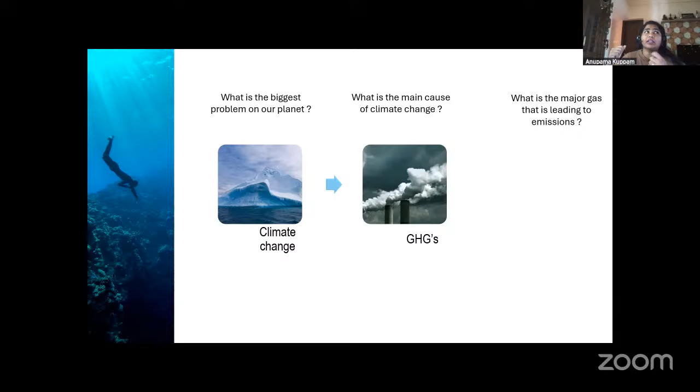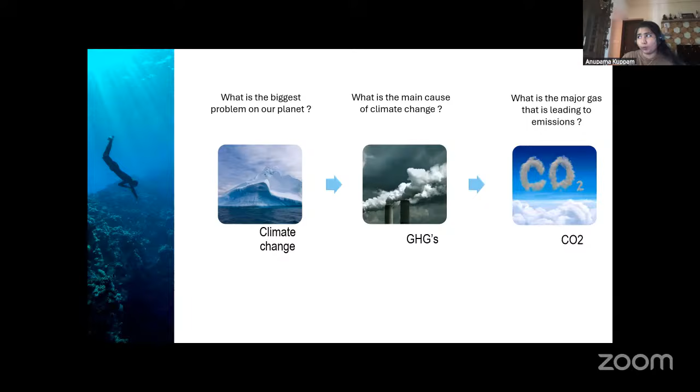Out of GHGs, which is the major gas leading to these emissions? There are n types of gases like carbon dioxide or fluorides, etc., which are even causing trouble to the ozone. But my main focus is CO2. I'll tell you comparatively how much CO2 is, when compared to other gases. Carbon dioxide itself releases around 76% of emissions, and the rest, like methane, nitrous, fluorinated gases, and other gases, are in very minute quantities.

The second most common cause is agriculture. Why am I telling you agriculture? Because it includes crops, landfills, waste, and also deforestation - these all come under agriculture. We have been studying that throughout architecture, I believe.

And the next one is industry. What comes under industry is oil and gas, some iron and steel production and extraction, and also mining. I can say mining is one of the major concerns under industry.

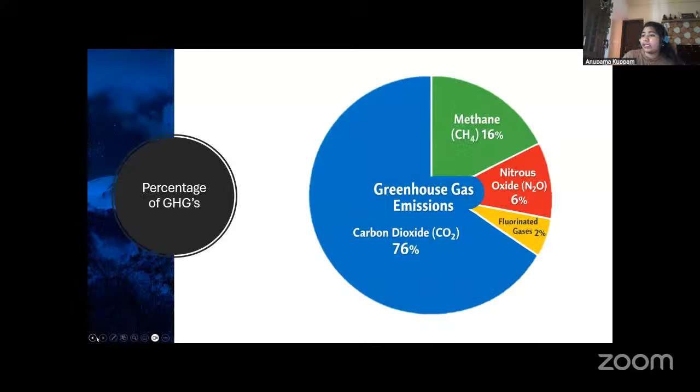They started with carbon neutrality. It is something similar to net zero, but not net zero carbon. Why? Because in carbon neutrality we focus only on carbon - whatever carbon emissions are done outside, we try to balance it, that's it. But when it comes to net zero, we count carbons, nitric acids, sulfur, fluorine, and chlorine substances which we release - everything together as a package. That's where it differs between carbon neutrality and net zero.

And then comes the Paris Agreement. How many of you know the Paris Agreement? This is one of the most important agreements made in history, which created a solid framework. More than 197-198 nations came together and agreed that they are going to limit global warming to 1.5 degrees, not more than that. That is what was decided in the Paris Agreement.

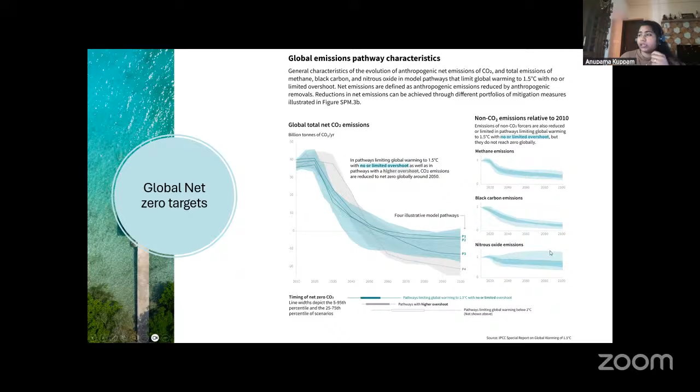There is something called carbon negativity, where I won't emit any carbon, and also I will do something positive to the environment, which will create carbon negativity. I'll give a brief of it in coming slides.

So, scope of emissions. This is very important when planning something for net zero. There are three types of scopes. Scope one is direct emissions. Scope two is indirect electricity emissions. Scope three is value chain emissions.

Scope one or scope two are easy to manage, or easy to put benchmarks on and ask a company or building owners to follow. But scope 3 is a very high level target, where unless you reach scope 3, you won't be able to achieve a net zero building.

Scope one, direct emissions, like fuel use in vehicles, boilers, industrial processes. For example, a few projects I've worked on, like substations, there are situations where the complete energy used inside that substation is 100% renewable. They are not using any diesel generators or something. So that comes under direct emissions.

Scope 2 is indirect electricity emissions. I have a building where I control my direct emissions, and I have to control indirect electricity emissions, which is not coming directly through my building but coming from somewhere else. I want to reduce that so that I can balance my carbon emissions.

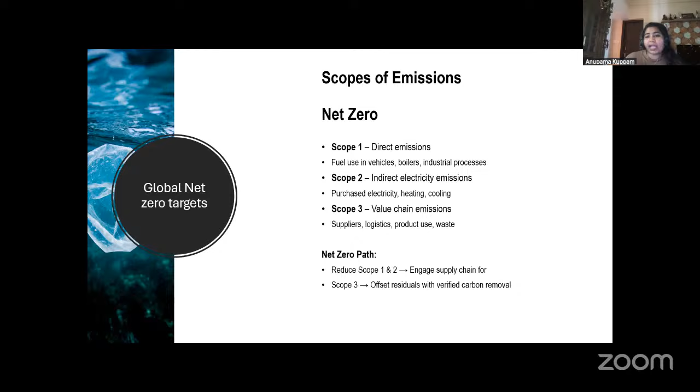Coming to next, we have talked a lot about carbon emissions. Let me tell you how many types of carbon emissions there are in the entire life cycle of a building. There are two types basically: one is embodied carbon, one is operational carbon. What is the difference between these?

Embodied is what comes with the material, like raw material extraction, transport, manufacturing and all. Operational carbon is when a building is ready and you're using lots of HVAC systems, lighting systems, like if it's an office building or something, you are using lots of PCs and all. Due to use of these things, how much carbon is emitted during the life cycle of the building comes under operational carbon.

So this is the whole life cycle. When you're free, just go through this map. This is really helpful if you can read it once. As an architect, what are the stages which are important for us? Let me start.

Extraction of raw materials comes under embodied. For example, say I decided that I want marble for my home which is from Rajasthan. In Rajasthan, to extract this marble, they use lots of equipment, lots of vehicles which release carbon - that comes under embodied. Then transport to factory: from that mine, it is transported to the factory to make it perfect, shaping it or polishing it, whatever it may be. It has to be taken to the factory for transport.

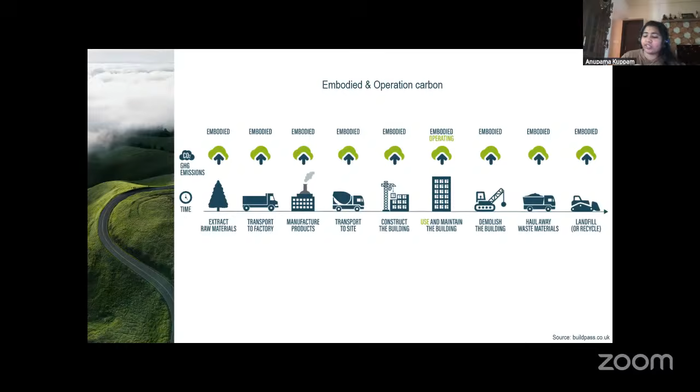This is in Maryland, USA, where they have used photovoltaic systems, geothermal wells - you can see how deep they have gone to maintain the temperature - and a high performance electromagnetic envelope, earth-coupled heating and cooling system, and thermal pool. This building has a lot of solar panels, almost 3000 solar panels, where it sells more power than it buys. So as I told you, if a building can produce more than it uses, it obviously comes under net zero.

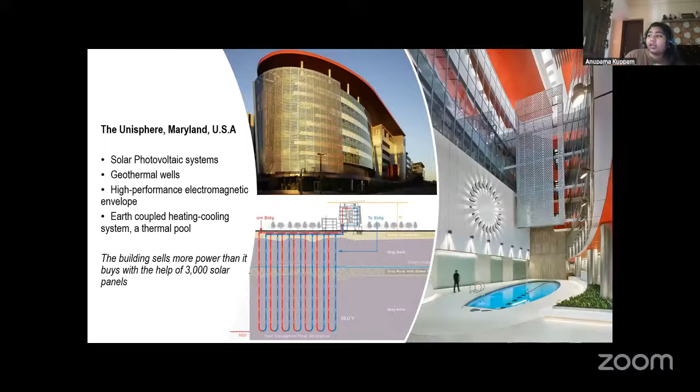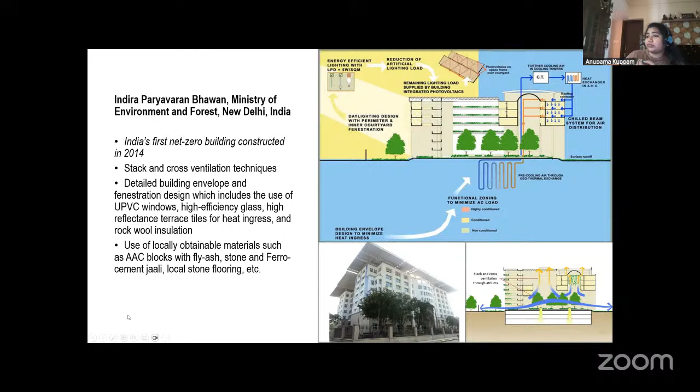When you get the presentation, you can just go through these two buildings. They are very good examples. So, something about net zero. Now you have a very good idea of what net zero is. Now, how will you achieve net zero?

This is through something called green rating systems. Why green rating systems? See, we all studied architecture, right? There are people who haven't studied architecture by degree but are also practicing in the market. What is the difference? Your teachers, your faculties have framed a syllabus, your university has framed a syllabus, and they have sent benchmarks for you on what you have to learn every year, every semester, and made you perfect as an architect before sending you out of the university, right? If you don't have that knowledge or that roadmap, would you be able to be that efficient?

No. Same thing - if I want my building to be green rated, there are some fundamentals and benchmarks set for it by government, and sometimes private bodies also. So these are called green rating systems.

So I'll start with 5 W's: what, when, why, where, which. After these 5 questions, a lot of the questions you might have about green rating systems might be clear. First, we'll start with what. What is a green rating system? It is a framework where reducing the impact on environment is the first priority.

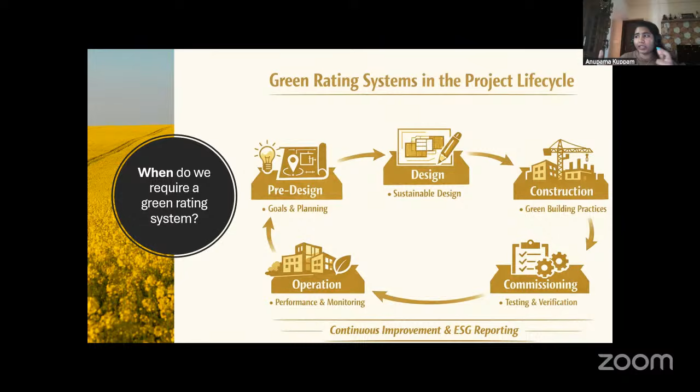During operation, it is an optional thing. When it comes to LEED, there are two versions: one is the new building version, the other is the operations version, where you focus only on operations of the building but none of the previous stages. So that is also an important stage.

So why are green building rating systems important? The answer is, first, climate goals. Has anyone heard of SDGs, sustainable development goals? There are 17 sustainable development goals which we are targeting, and all nations are targeting.

So the first priority is climate goals, and then comes health and safety of who is residing in the building. Then resource efficiency - we know sustainability means not compromising the needs of the future, so resource efficiency is also a key aspect. And then minimize environmental impact, and ensure compliance and accountability.

When it comes to compliance, some places have already made green rating systems mandatory - it's not optional anymore. For example, I recently learned that Andhra Pradesh has made ECBC mandatory for sites more than 2000 square meters. So one by one, states and nations are coming forward to make it mandatory.

Where are they used? Mainly in the built environment where we all are working. Then comes urban infrastructure - not only buildings but also bridges and highways, where tons and tons of concrete is used, so it comes into place there too. Public and institutional, environmental and policy, like ESG goals - environmental, social, and governance goals.

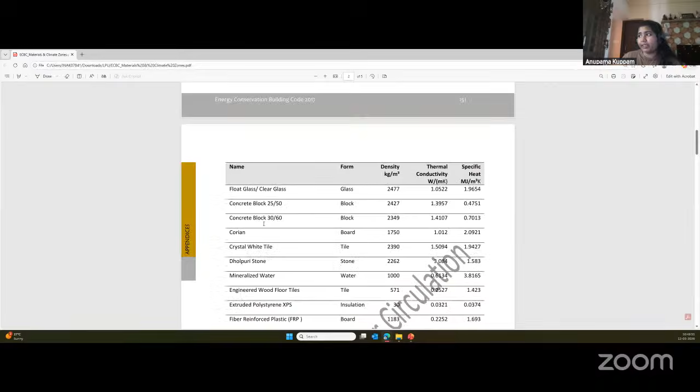So let me share this. I have shared this PDF, which is 5 pages. This is a part of the ECBC rating system copy, where you have a type of materials, and then the density, thermal conductivity, and specific heat of materials was given. Mainly these materials are from India. There are almost 4 pages of materials, and on the last page I have given you a map to know which climate region that particular place is in. So I have your design brief where people are working on the Noida project with Modark.

So I want these people who are working on this project to choose their own design project, but other people from the final year or something can choose any place you want in India. Note the type of climate and the area.

I have already shared with you one website - this is the U value calculator website. Now I'll explain what the assignment is, so listen to it, guys.

Let me share my screen again. Why is this assignment chosen? Because the primary aspect of all the things a green rating system has is energy conservation. So it's given ultimate high preference compared to other things. Let's do a short exercise on energy conservation through building envelope design.

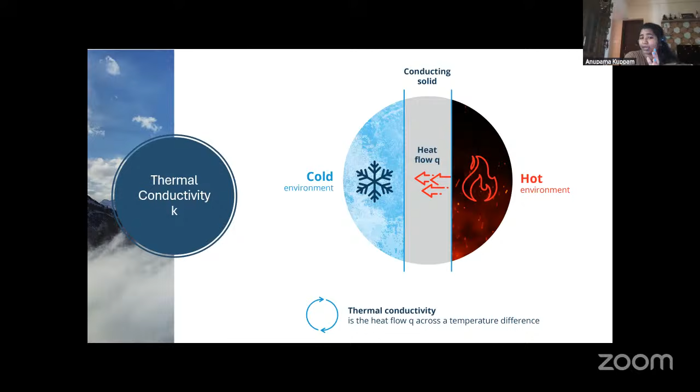First let me explain what thermal conductivity is, and then we go for how we do that. Thermal conductivity is something we learn from first, second class science subjects - it's heat transfer from one side to the other. There's a wall of my building, there is sun coming, and there is some temperature being created here. How much of it is going that side? How much of it is my material absorbing and sending inside my house is known as thermal conductivity.

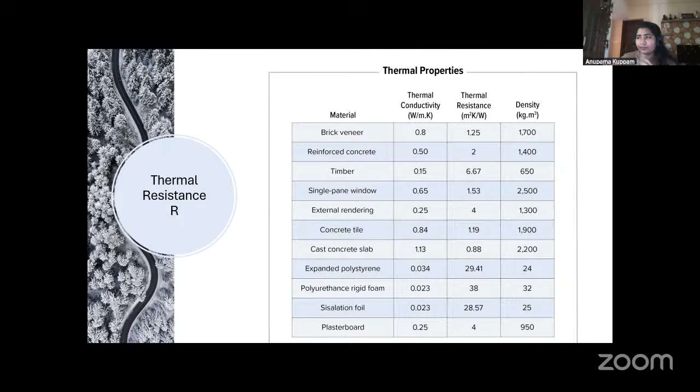Then comes thermal resistance - this says how much energy my material can absorb inside, not to send inside, but absorb and reflect, resist itself. Then comes thermal efficiency - this is a combination of thermal conductivity and thermal resistance, after resisting itself and giving a specific amount of heat inside. That heat inside my building, how much efficiency it can create, is called thermal efficiency, also known as U value. When we talk about U values and R values, this is regarding thermal efficiency.

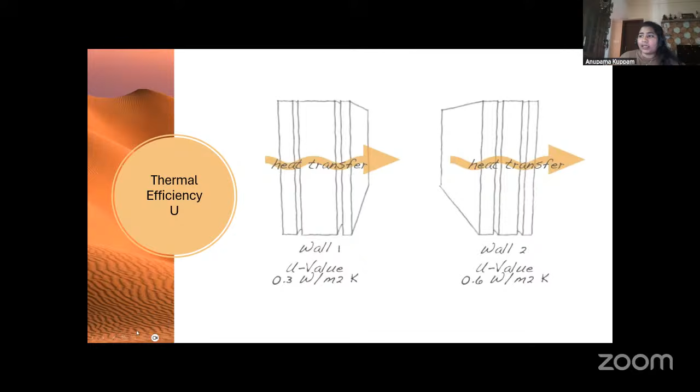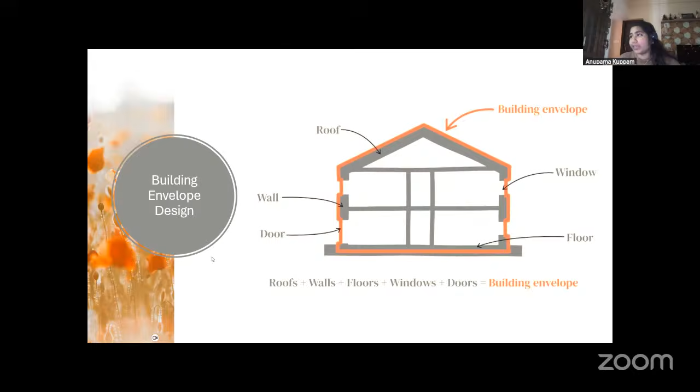So what I want you to do is, whatever climate you have chosen, try to design a wall, a building envelope of your project by choosing materials by layers. For example, I'll tell you - suppose I have chosen my site somewhere in Rajasthan, at the end of Rajasthan. So it comes under hot and dry climate.

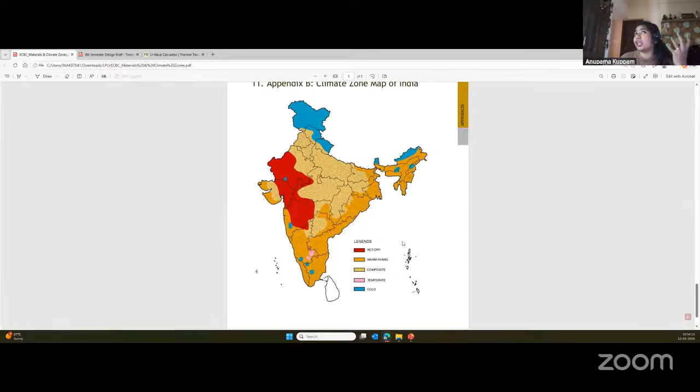In hot and dry climate, what do I think of? How much insulation should I give? So let me start with some cladding material - plaster board material, then plaster, then some insulation. Choose the material from here, you're free to choose from online as well, but you should have the thermal conductivity value. If you ask AI, maybe it can give it easily.

Choose the materials here, make layers and make a wall. Every time you choose a material - for example, I'm choosing a plaster board - I'll add a layer and tell it plaster board, and then the thickness of the material. You all know normal thickness available outside. For example, I'm choosing 20 for plaster board material, and then thermal conductivity where you will get from this - choose where is the plaster board.

You just search for it and get the thermal conductivity value, then paste it here. Add layer - like this, I want you to prepare layers of a complete wall of your project which you are suggesting as an architect.

Any doubts? Is it clear? Any student want to say something? Any problem? Yes sir, okay guys, just do this exercise.

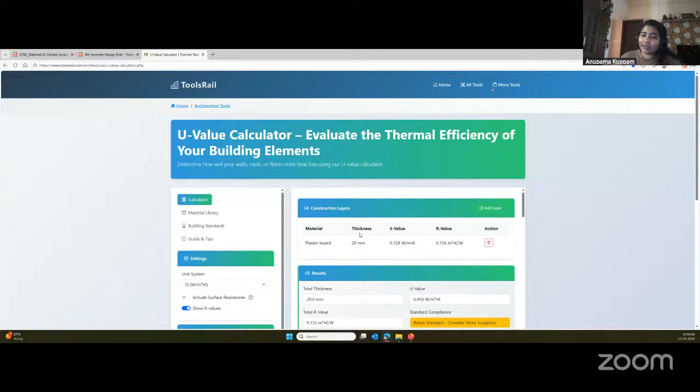Later on, I will tell you if whatever wall you have designed is meeting the sustainability criteria or not, and how to know it. So from now on, you won't get a question of what material to use.

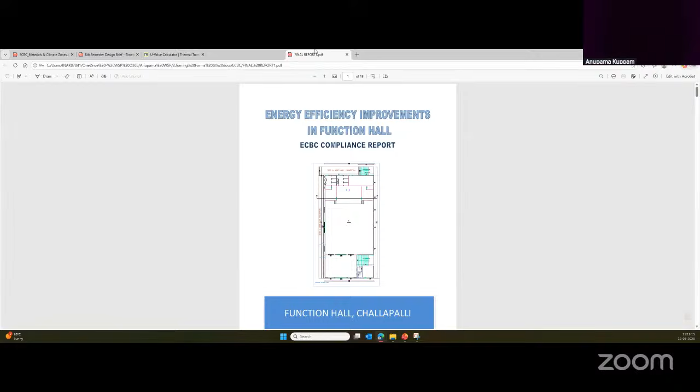This is an example building, kind of confidential, but just for what you have asked, I'm showing you. It is a convention hall. They are renovating it, and they have to achieve the green targets rated under IGBC and ECBC. So instead of going for whole reconstruction with new materials, whatever wall assembly they had, they just added a layer of insulation to the existing wall.

Then comes energy efficiency. Since the building was already designed and in place, we can't redesign with high ceilings or something now. So whatever existing equipment is there, like the ACs and HVACs and lighting systems, they have upgraded from 3-star rating to 5-star rating. The glazing systems, the panels of the windows are changed, only the glass panel is changed, the frame remaining the same. So whatever little modifications you can do, maximum modifications will be through the rating system.

If I am using a central AC system which is 3-star in my convention hall building, imagine how much energy I might need. Changing everything to 5-star will eventually reduce my electricity bill by up to 60%. This is agreed and okayed by both IGBC and LEED. So you have to find out what opportunities you have in your existing building. All lights are being replaced by LEDs, just an example.

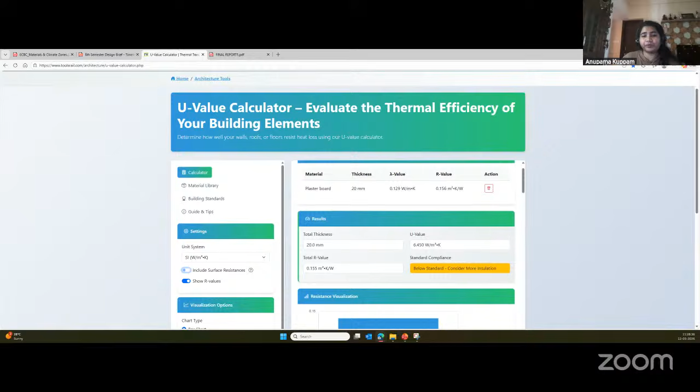Anupam, yes sir. Hello, hi. So we had made the wall using extruded polystyrene of 100mm and then again plaster, and here we are getting 'meets most building codes' as our answer.

Okay, so the total thickness is 350. The U value is 0.284, yes.

Okay, and where did you select your site? Noida. It comes under composite climate. Under which composite?

Okay, your answer is 0.284, right? U value, yes, watt per meter square Kelvin.

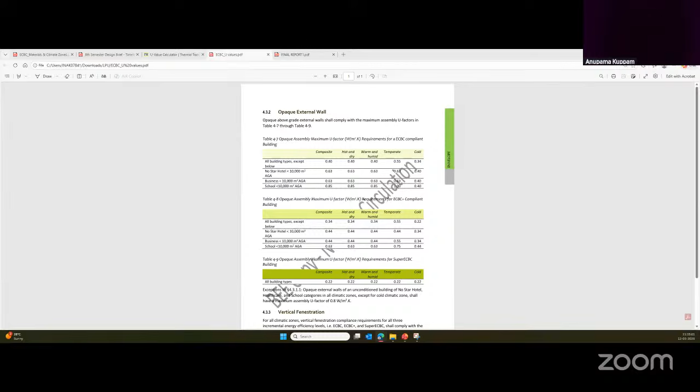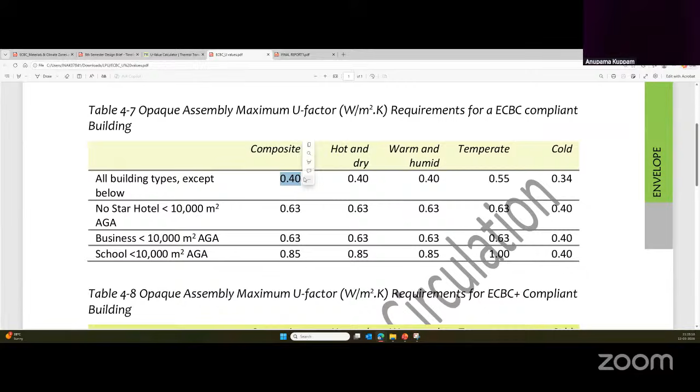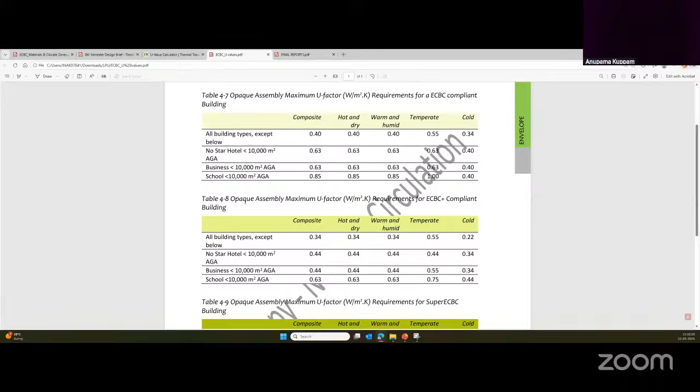So you can just give them whatever U values they got in composite climate, that comes under all building types. If their U value is under 0.4, they are good to go for ECBC compliant building certification. If their U value is less than 0.4 and came to 0.34, they are at a little higher stage, ECBC plus compliant. And now whosoever has given a U value of 0.284, for example 0.22 and under, they are good to go with super ECBC building, which is the highest level of accreditation.

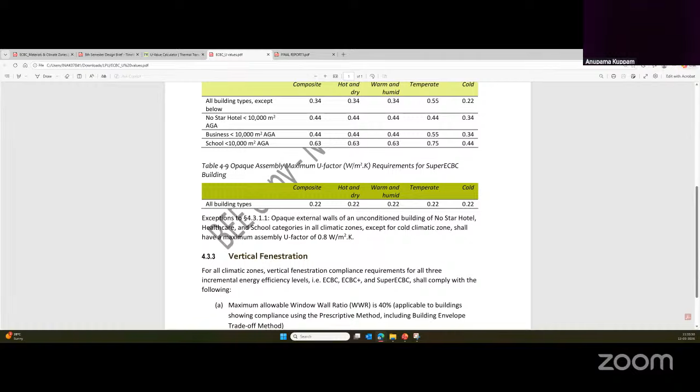So I just want students to go through this and see if what they have designed aligns with the rating systems or not.